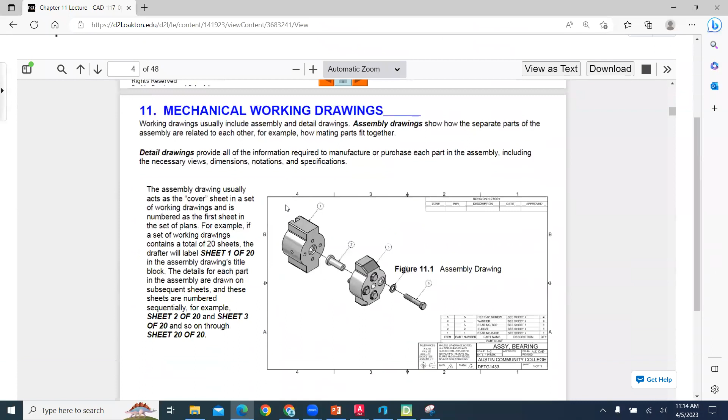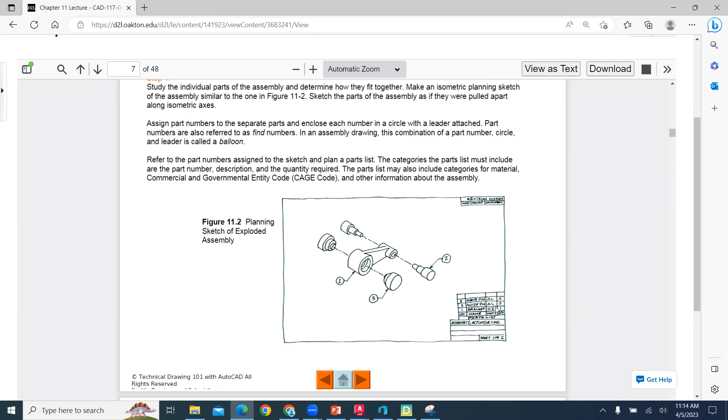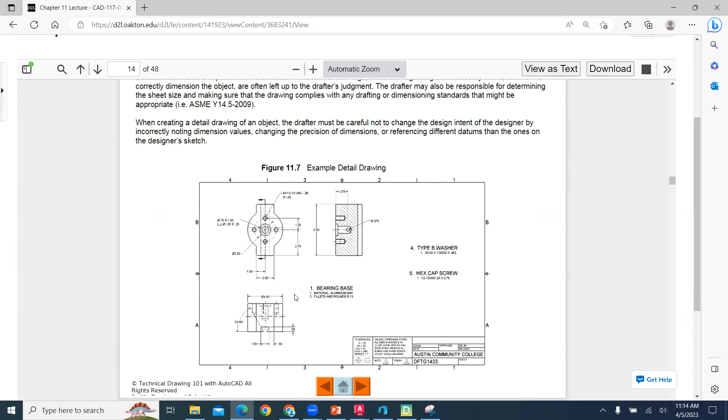And so as we take a look at how we have been working on the course, mechanical working drawings, assembly drawings, and basically we've all seen these. It's just a matter of being able to use standardized technical drawing applications to communicate how things go together. And then we use these balloons in our bill of material to be able to call out those different components. They also create two-dimensional drawings and detailed drawings. You're welcome to create the 2D drawings as bonus, but that's not required.

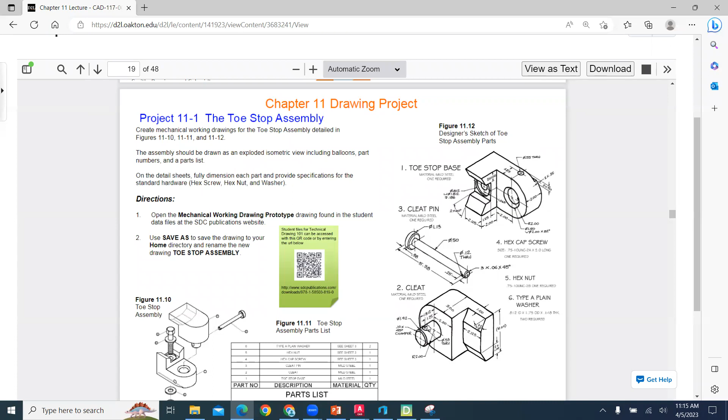And then as we go through and we look at our assignment, here are the dimensions for the toe stop assembly. We'll have our base. We will have a pin that holds the top cleat to the base through this hole right here. And that hole will go through this pin hole like this as it's showing in the assembly. And then we have a washer, a nut, and a threaded fastener.

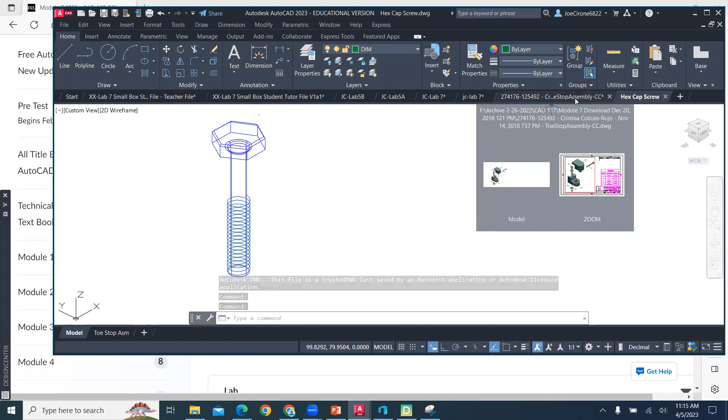We go back into the D2L. We've given you the hex head cap screw that you can download. And so you can download it. And we've taken this, actually this is a drawing. I thought this was from McMaster-Carr, but it's a simplified version of it.

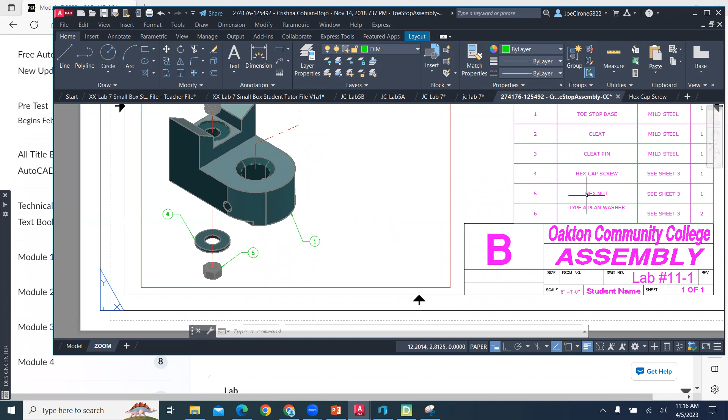And here's what our final drawing project will look like. We'll use our B-size mechanical title block. We'll create a table with our different components. And then we will create balloons using multileaders to call out those different components in our quantity, in our description. We look at this in model space.

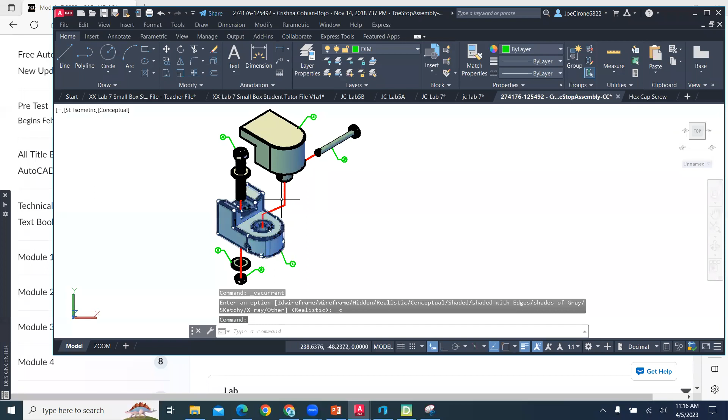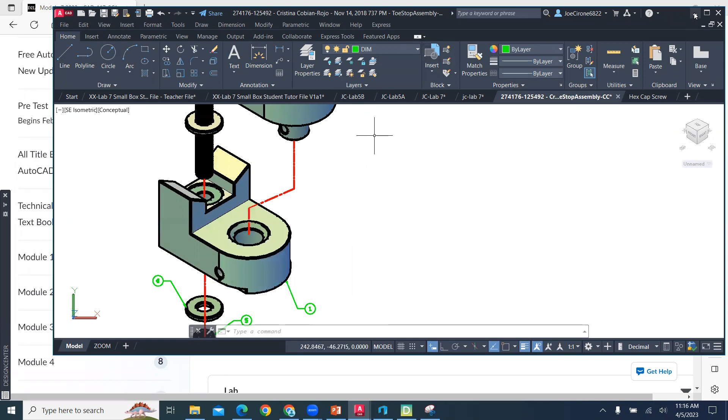Model the parts. I like to use these red center lines to show how parts are linked together. And then we'll use multileaders with balloon callouts to identify each of the different components. Alrighty. We have web pages of how to complete each of the different components. And so if we were to take a look at some of the web pages, excuse me, some of the video tutorials.

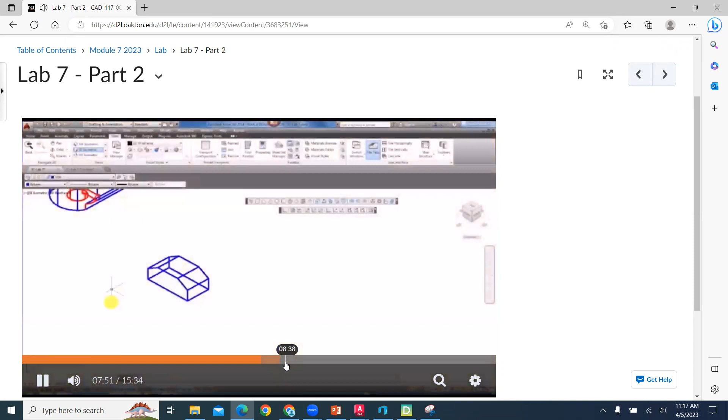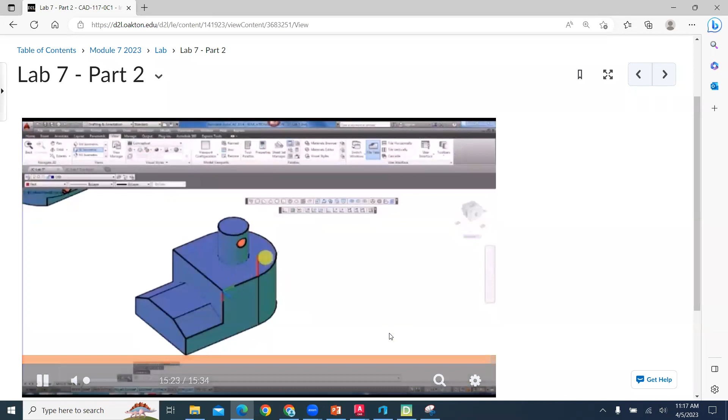Continue to model the different components. Working off of our existing skills that we've learned, creating technical drawings for mechanical assembly. Show you how to put in the pins, subtract those out. Not an easy lab. It will take you some time to go through and create these models. So we have created video tutorials for those, showing how everything goes together.

There's a mechanical title block. This is a bonus assignment right here, double bearing assembly, and the gazebo is as well. So if you really want to do some more work, we have you covered. Back to the main splash page.

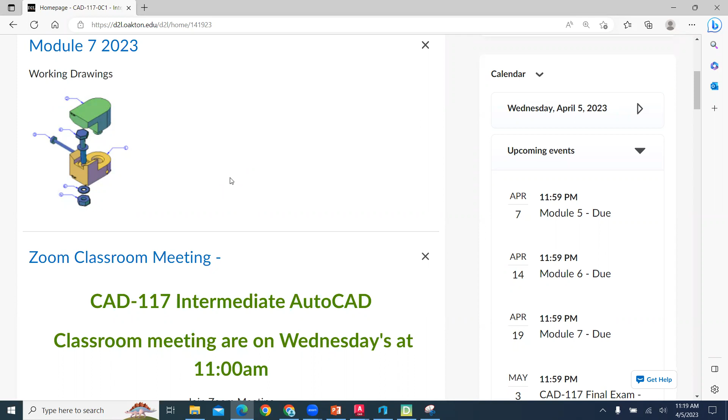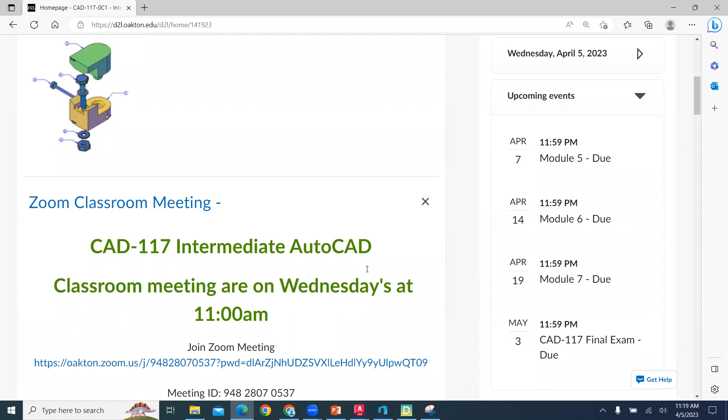And that's basically it. As we start to wind down and getting our modeling in our drawings done, remember that you're welcome to come into the campus for additional help. We're available on Wednesdays at the Skokie campus from 8:30 until 12:30, Thursday afternoons, 2 o'clock to 6 o'clock, Skokie campus, P130. And on Fridays, virtually on Zoom, you'll need to request a meeting by email. Please use the D2L email that's preferred over the Gmail account. And then on Sunday, this Sunday is Easter holiday, so I would not recommend that day, but if you are needing help, let us know and send us an email.